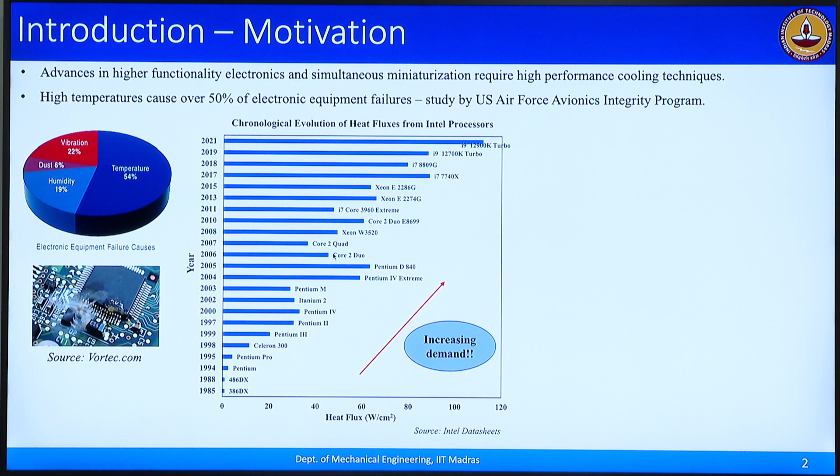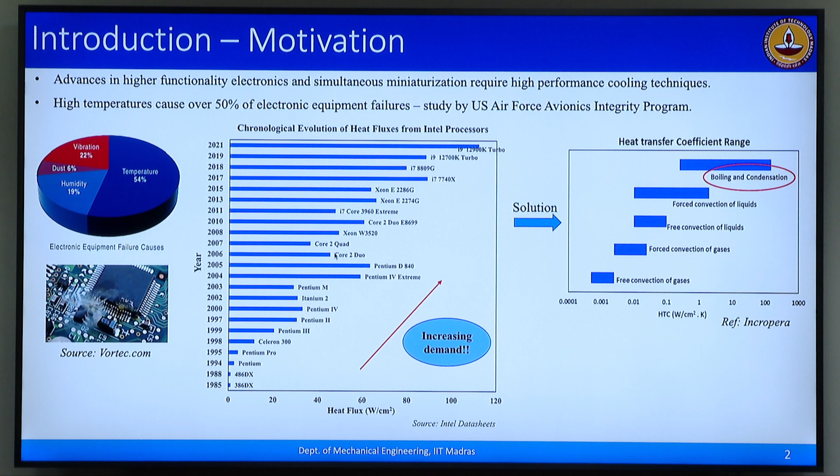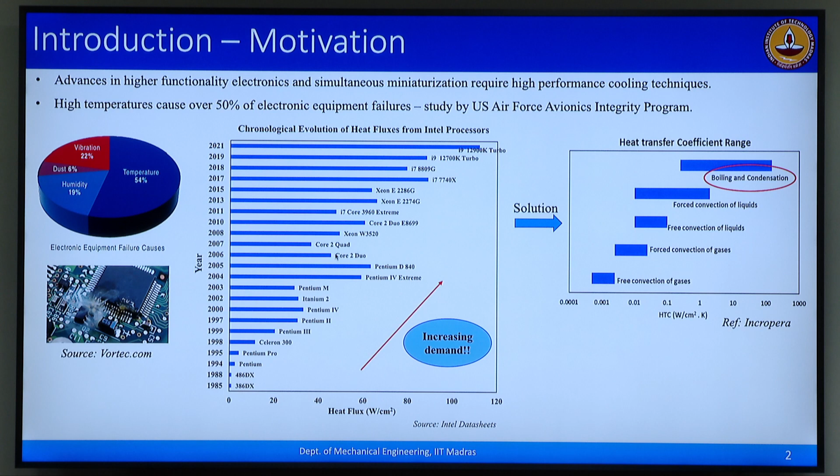If we look at the failures, more than 50% of electronic chip failures are due to temperature, or high temperatures. And if we look at the solutions for removing this heat, we can start with natural convection, and finally the highest heat transfer coefficients we can get are from boiling and condensation. So we can use a device which combines boiling and condensation phenomena together, and the possible solutions for that are heat pipes or thermosiphons.

These heat pipes and thermosiphons use boiling and condensation, as you have already seen before. We will talk about modifications of that—like if we change the wetting conditions of these heat pipes or thermosiphons, how we can further improve the performance.

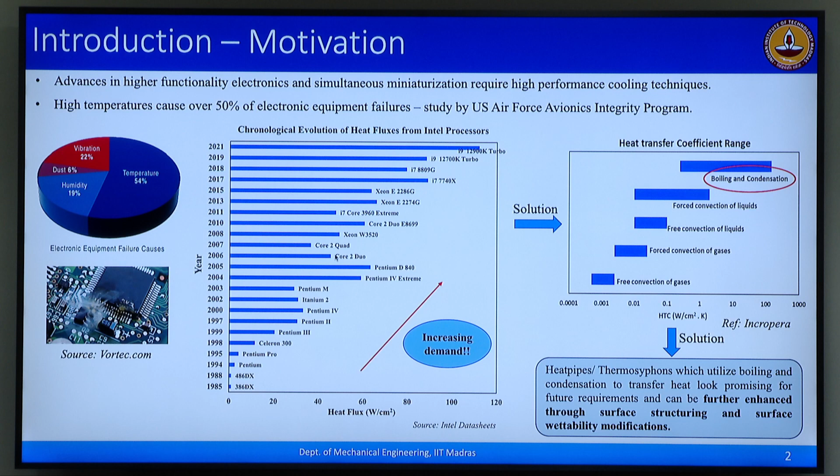Before going into wettability or surface modifications, since there are many students here, I will first define what wettability is. When we talk about wettability, we are talking about liquid spreading on a surface, and we define a contact angle. This contact angle is: when you put a droplet on a surface, the angle it creates at the three-phase contact line is the contact angle, which we show as theta.

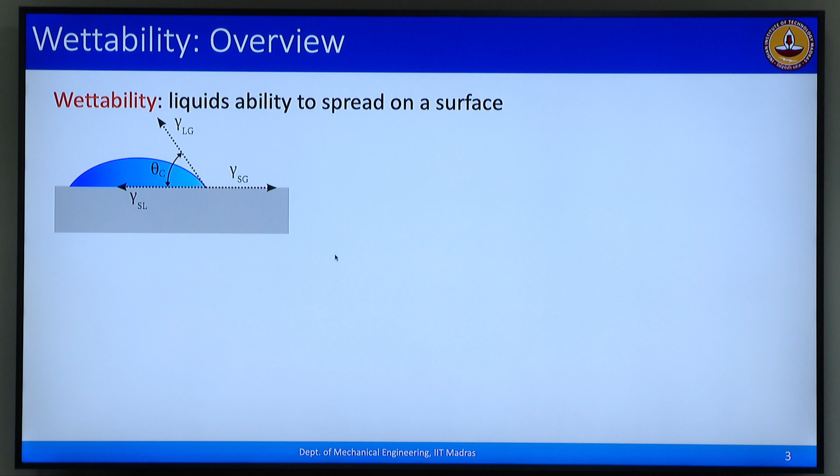So theta is the contact angle, and as I said, we define the contact angle like this. This is the classical Young's equation where the surface energies are related to the contact angle.

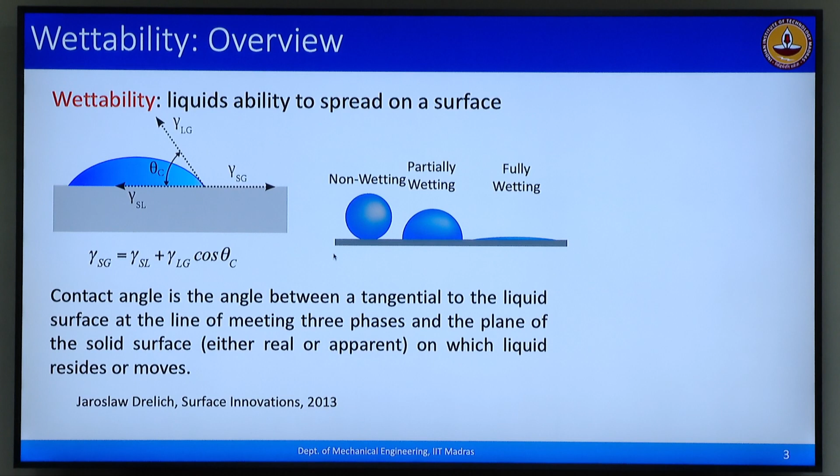Depending on the surface, a liquid can form different types of configurations. If a surface is hydrophilic—the last configuration here—the liquid will spread on the surface, and we call it fully wetting. If the liquid completely spreads on the surface, or the contact angle is close to 0, we call this surface superhydrophilic. If the liquid makes an angle less than 90 degrees but more than 10-15 degrees, we call it a hydrophilic surface. If it is more than 150 degrees, we call it superhydrophobic, and more than 90 degrees is hydrophobic.

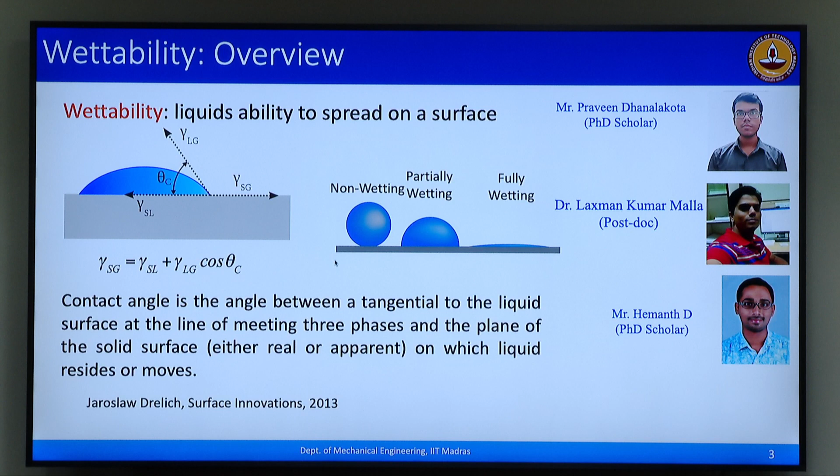Today I will talk about work mainly done by our students—mainly Praveen, Laxman, who was a postdoc, and Hemanth. We will talk about their work mainly. There are two more definitions required: one is advancing contact angle, the other is receding contact angle.

When you put a liquid on a surface, this is a way to measure the advancing contact angle. Now if you tilt the surface, it will create two different angles—one in the front, one in the back. We call the front angle the advancing contact angle, and the back one the receding contact angle.

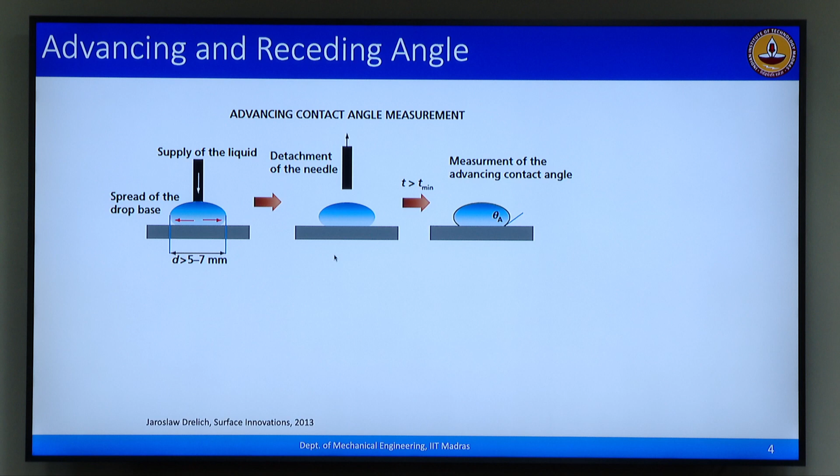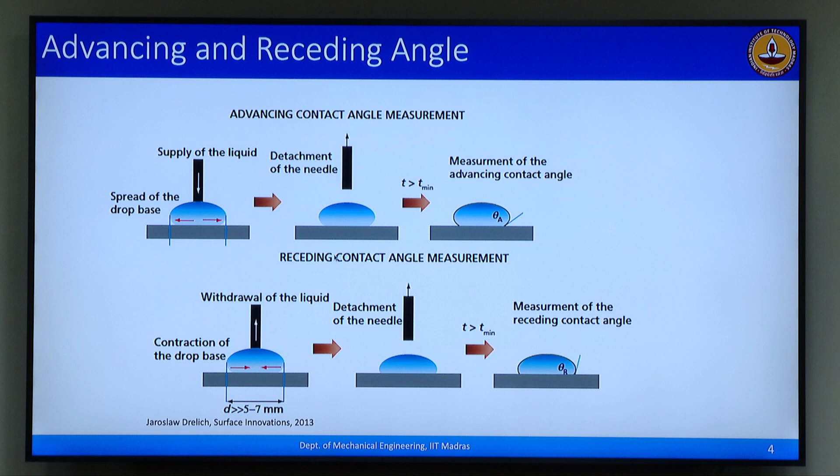To measure that, generally we put liquid on a surface and then pump it, measuring the angle as it advances. Similarly, if we try to recede or withdraw liquid from the droplet, the diameter changes, and we call that the receding contact angle. The difference between the advancing and receding contact angle is called the hysteresis of the surface.

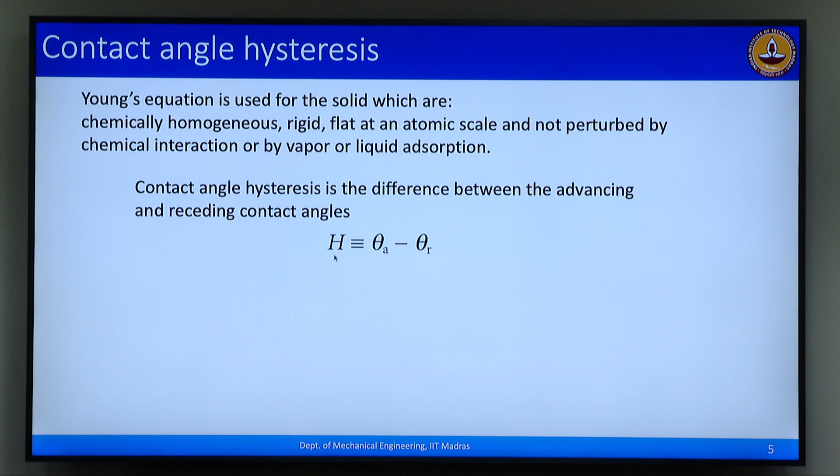With this background, I will start the discussion on wettability modifications on the devices. This contact angle hysteresis, depending on how we create the surfaces, can be very high—like 10 to 50 degrees—or if we make a superhydrophobic surface with very low contact angle hysteresis, it can be below 5 degrees.

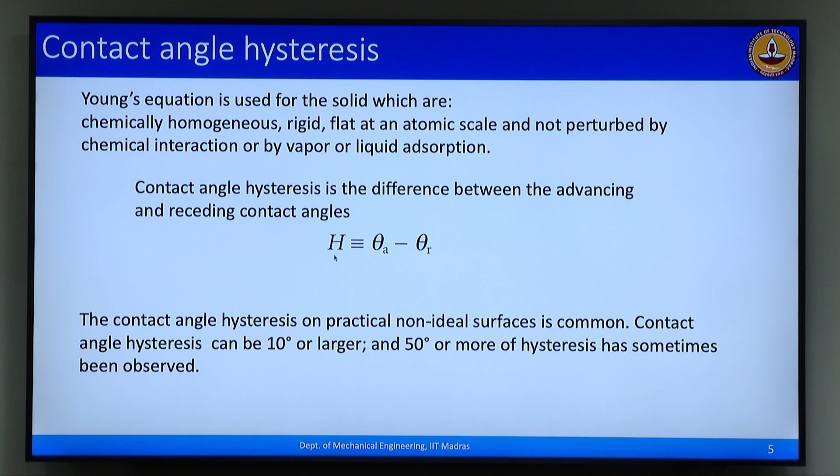So, first I will start with a pulsating heat pipe, what we have seen in the morning today. This is the working principle of a wick based heat pipe, where you have a wick and the liquid will evaporate, go towards the condenser, and come back through the wicking.

A pulsating heat pipe can also be of two types. One is a capillary tube pulsating heat pipe, where you have capillary tubes, and vapor plugs and liquid slugs will move, or it can be a flat plate pulsating heat pipe, like the one you can see here. It is like a flat plate where microchannels are cut into it, with evaporator sections, condenser sections, and in between adiabatic sections.

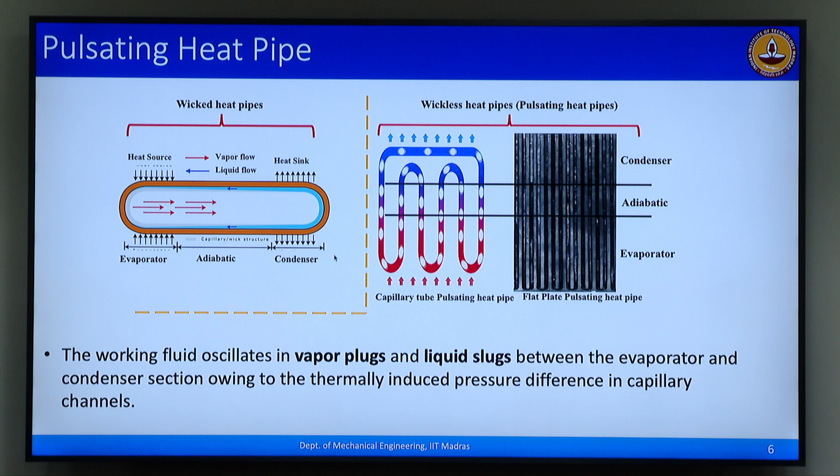This contact angle, or the surface properties, have different roles, particularly in boiling and condensation. This video should play. Okay, so it is playing. If you have a very low contact angle on a surface, your bubble dynamics will be different in boiling conditions as well as in a condensation scenario.

In this condensation scenario, the first figure is a film-wise condensation. If your surface is hydrophilic or superhydrophilic, you will see film-wise condensation. If your surface is hydrophobic or superhydrophobic, you will see drop-wise condensation.

And in the flat plate pulsating heat pipes, we can modify either the evaporator or the condenser, or generally you can modify the whole heat pipe itself.

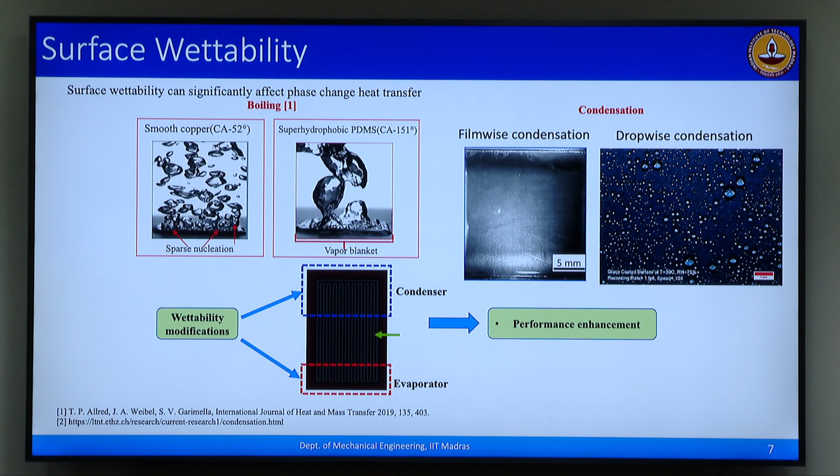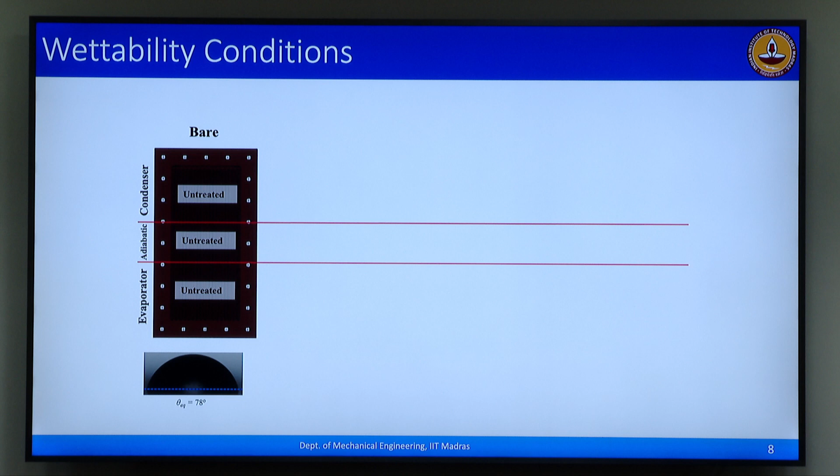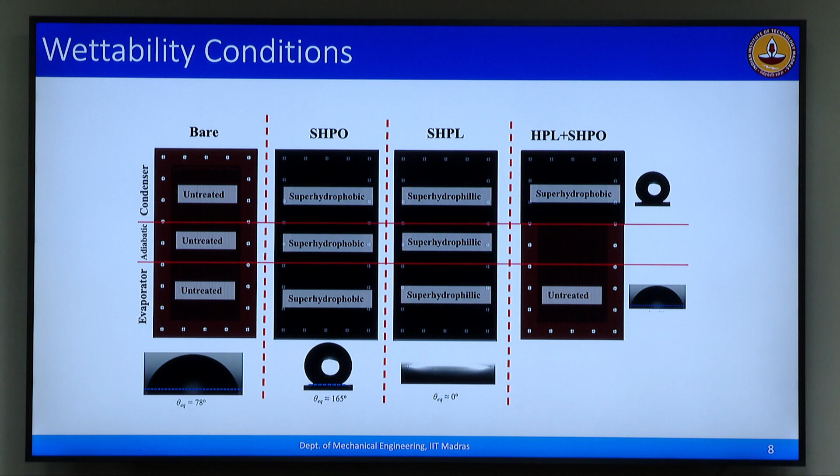What we did: we took a bare surface which has a contact angle around 78 degrees. We modified it to be superhydrophobic, with all parts completely superhydrophobic. We also made all parts superhydrophilic, and then we did a partial version with a superhydrophobic condenser and a hydrophilic evaporator and adiabatic sections. We observed the performance and how it changed.

I will not go into very much detail about it because Marco has already discussed the heat pipes. I will just talk about how we can modify surfaces a little bit, so if there are students who want to use these modification techniques, you can. These are not very difficult to do; they are mainly chemical based techniques.

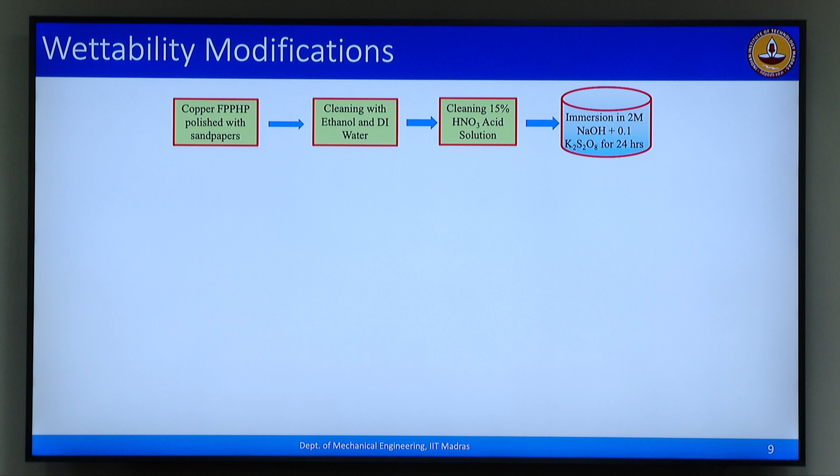So these are all copper based heat pipes, flat plate pulsating heat pipes. We took this copper flat plate pulsating heat pipe, polished it with sandpaper, then cleaned it with ethanol and DI water, then cleaned with nitric acid, then immersed it in sodium hydroxide and potassium persulfate for a certain time, dried it in a hot oven, and got a superhydrophilic surface.

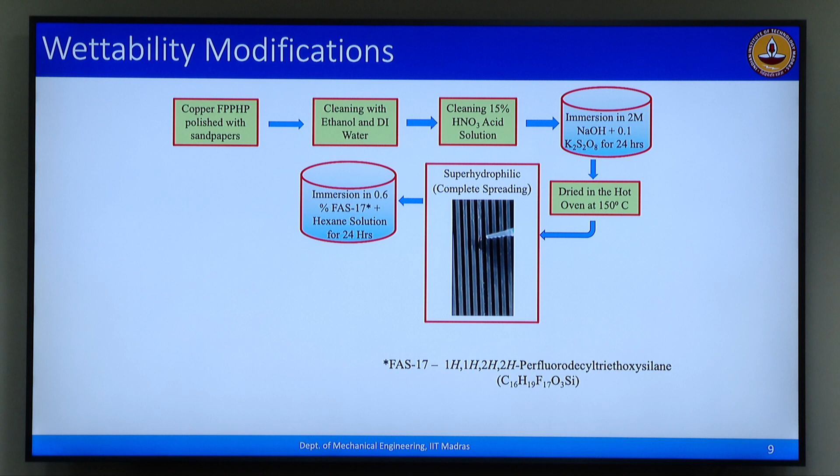Now, if you use a FAS — we talked about PFAS yesterday, that it may be banned at some point, but we are currently using it. We have also used some other techniques where you don't need any agents to create superhydrophobicity, but we have not applied anything like that here yet. If you are interested, we can talk about other methods of creating superhydrophobicity on surfaces and so on.

Then if we dry it, we get a superhydrophobic surface, with a contact angle around 160 degrees, and our hysteresis is also very low, less than 5 degrees. So this is one way of creating this.

After doing this, we observed the behavior corresponding to 60 watts, and we saw the best thermal performance when we had the superhydrophilic configuration — they call it superhydrophilic — and we got better performance and so on.

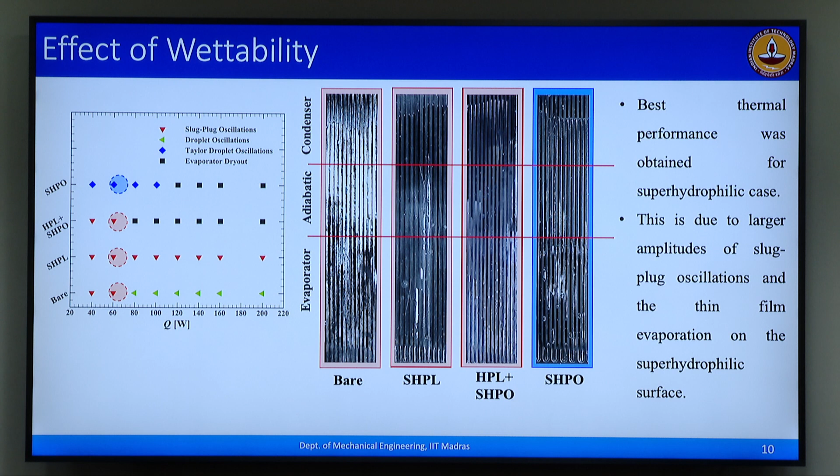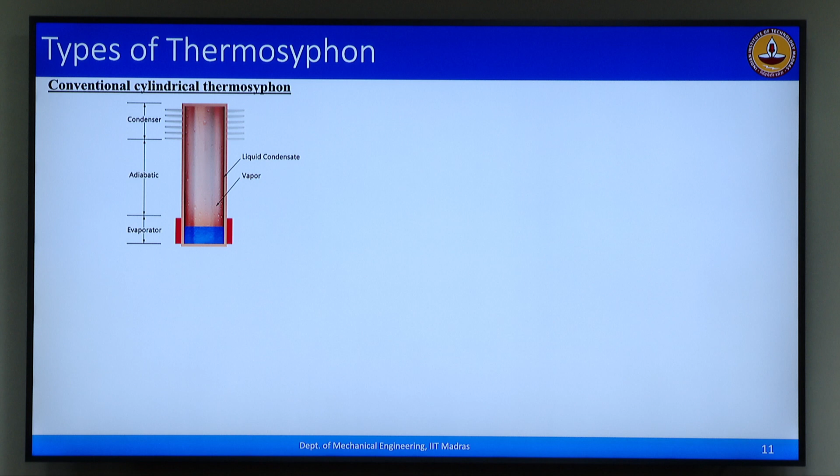With this, I will move to thermosiphons, where I want to discuss more rather than the heat pipes. We have worked on thermosiphons, and there are basically different types of thermosiphons.

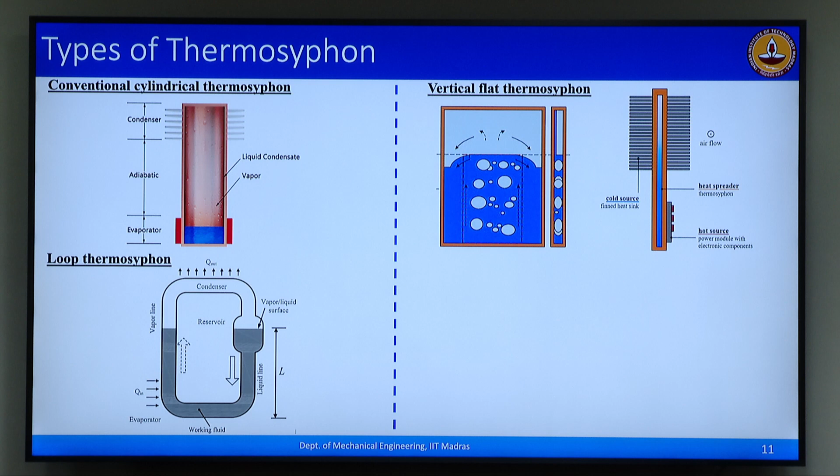Thermosiphons, as Marco also mentioned, are similar to heat pipes, particularly cylindrical thermosiphons. But there are other types, such as loop thermosiphons or vertical flat thermosiphons. We also have horizontal flat thermosiphons, which are compact and more suitable for cooling electronic devices.

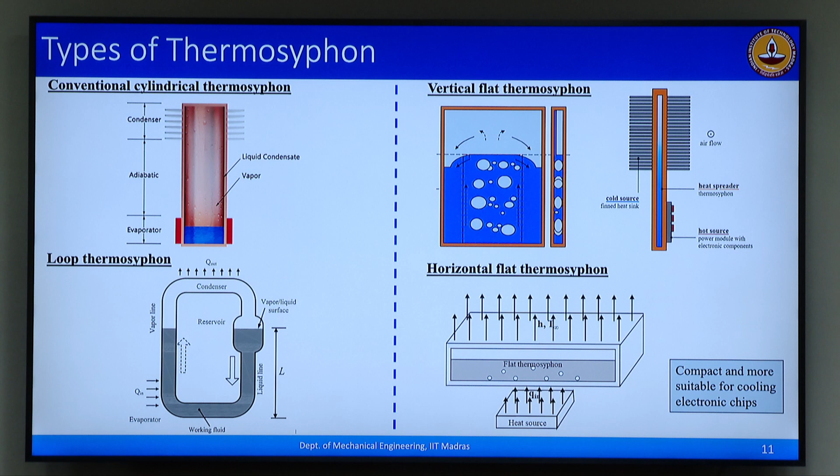Even if you have multiple heat sources, you can use this type of compact flat thermosiphon to cool it down. What we used is a thermosiphon with a heat source.

This is our initial work, using a compact flat thermosiphon which we call CFT, and we changed the surface conditions. We used a hydrophilic evaporator, a superhydrophobic condenser, and different combinations, to see how the performance changes with these modifications.

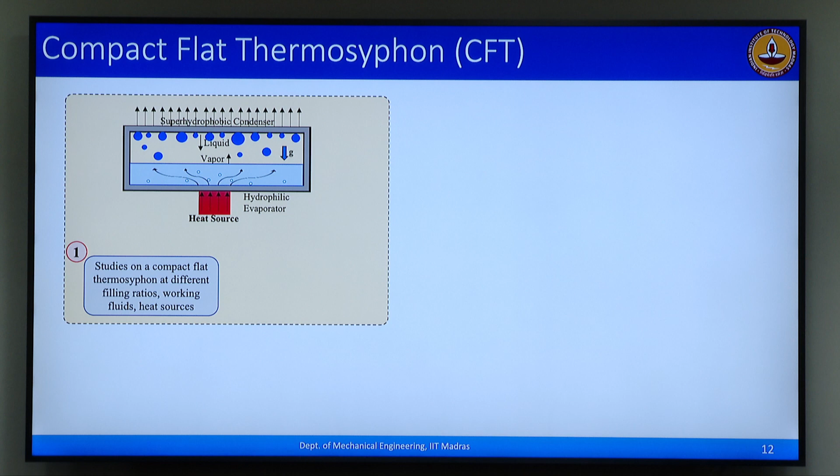Our objective is to study these compact flat thermosyphons at different filling ratios, working fluids, and heat sources. We also used wettability modifications on the evaporator and condenser to see how the behavior changes.

We have also modified the condenser to have hollow fins. So instead of a flat condenser, we looked at how the behavior changes when there are hollow fins at the top.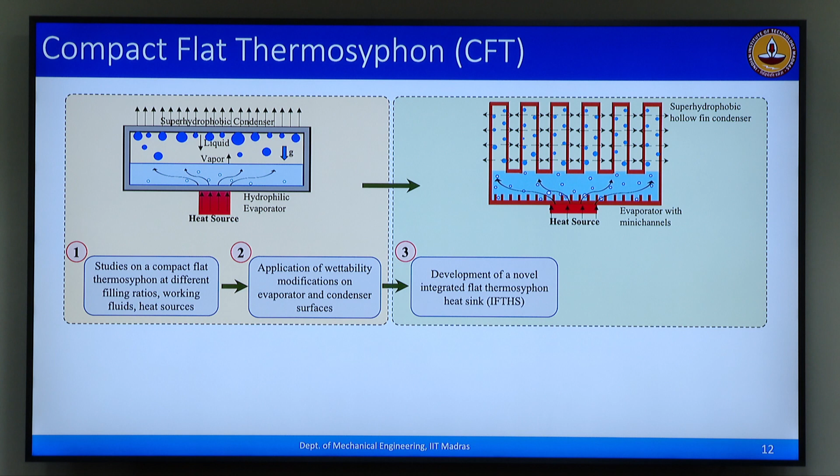We created an integrated flat thermosiphon heatsink with hollow fins, to see how that behavior changes. We also added minichannels in the evaporator section to get the benefit of both sides, the evaporation and the condensation.

So the objective is to study the thermal performance of compact flat thermosiphons for different filling ratios and working fluids, look at the wetting characteristics, and then for enhanced performance, see how we can use hollow fin type structures.

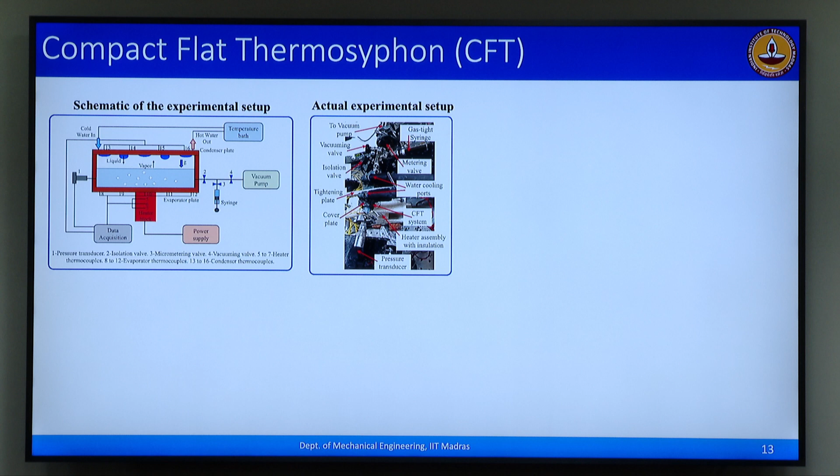To start with these compact flat thermosiphons, this is our schematic, and this is the actual setup. I will just skip this and start with the experimental process.

To understand the heat flux, the main problem with these closed devices is that you cannot see what is happening inside. We can only understand the outside, mainly the temperature data. We don't know exactly what the heat flux distribution inside is, or how the bubbles are departing from the evaporator section and how it is condensing. So we did separate experiments to understand the fundamentals of it.

There are other techniques to predict the heat flux on the inside surface, but what we did here, since we have multiple thermocouples inside the heated block, was use 1D Fourier's law to predict the heat flux given at the evaporator surface.

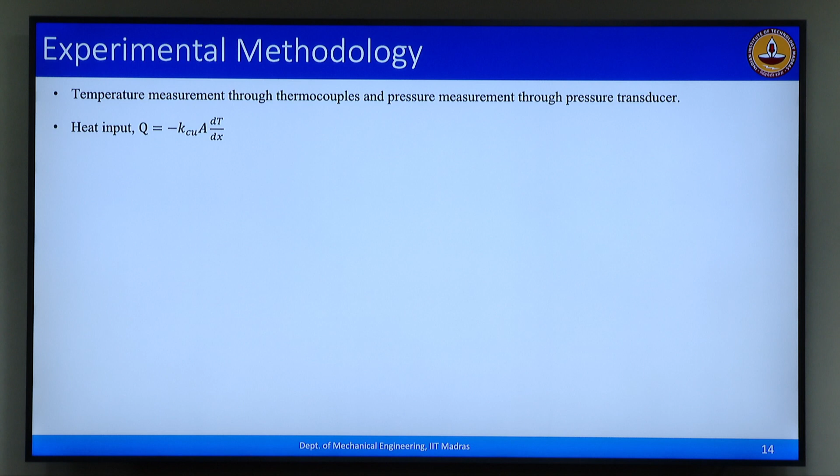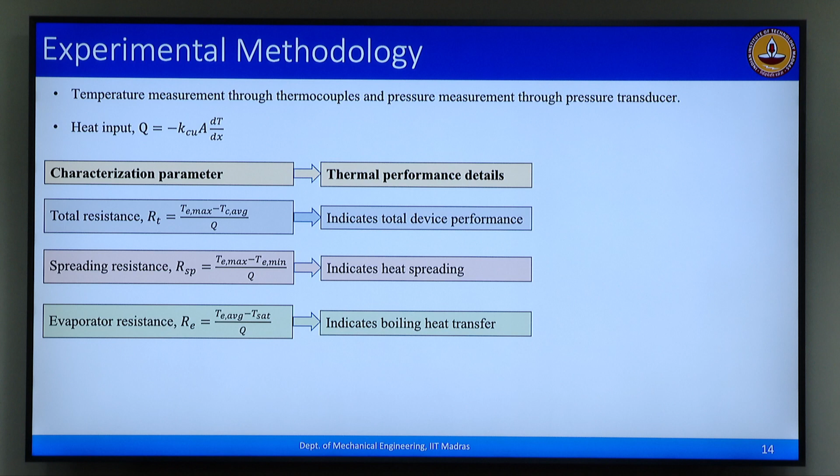Then we can characterize the total resistance, which indicates the device performance. We can calculate the spreading resistance, which indicates heat spreading. Then we can calculate the evaporator resistance, which indicates the boiling heat transfer, and finally the condenser resistance, which gives the condensation heat transfer. These are some indicators of our device.

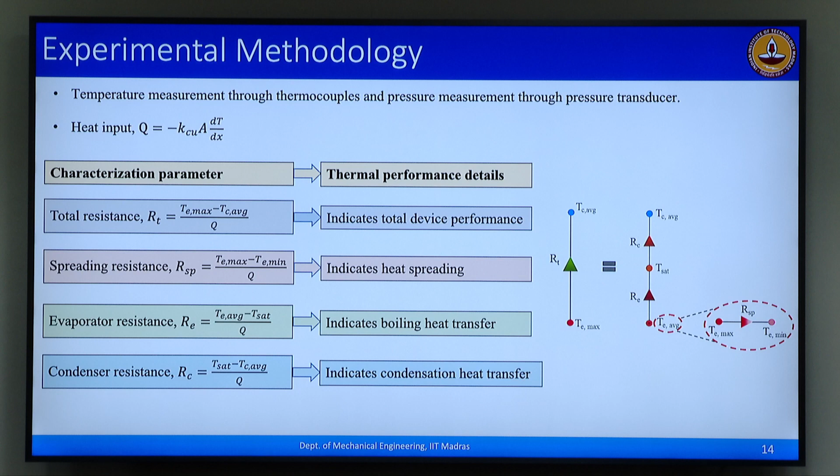We can also have the resistance map and so on. To see the effect of the working fluid, we did experiments with acetone, water, and ethanol, and observed how these behaviors change.

We found that at the evaporator, at around 40 watts per centimeter squared, the maximum temperature is for ethanol and the lowest temperature is for water.

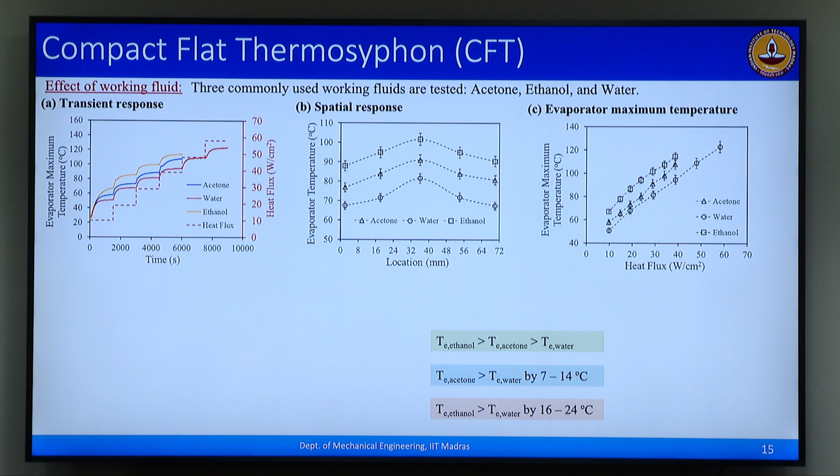Looking at performance in terms of total resistance, water has the lowest resistance. However, there is no significant difference in spreading resistance. For evaporator resistance, water is again the lowest, while ethanol has a higher evaporator resistance. The condenser resistance is also lowest for water.

With all this, we identified that water is the best working fluid due to its low vapor pressure and high latent and specific heat. So for these particular conditions, without any modifications, water performs better than ethanol and acetone.

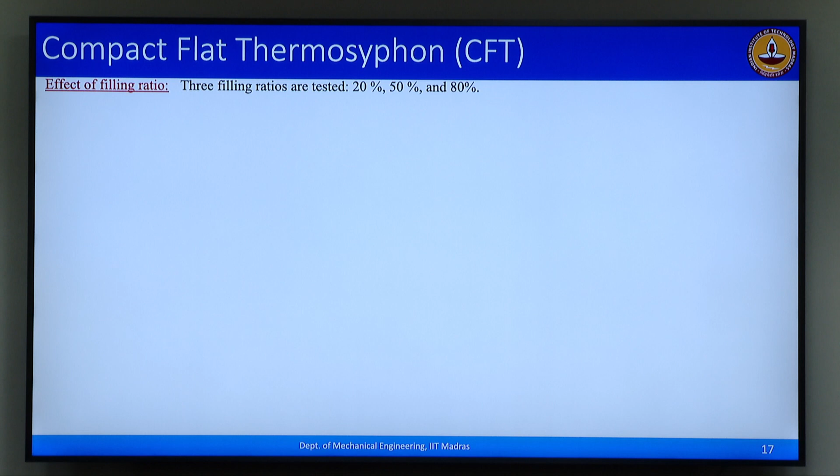We then also studied the effect of filling ratios.

So what we have observed is at 20% filling ratio, it is more than the 80% and the 50%. I will come to that reason here.

So when we have a 20% filling ratio, then we have less working fluid, and that deteriorates the performance. Whereas when the filling ratio is very high, like 80%, then it is giving a flooding type of situation, and that deteriorates the thermal performance. Whereas 50% gives the best performance, but we are not saying that 50% exactly is the optimum, just that it is better than these three conditions.

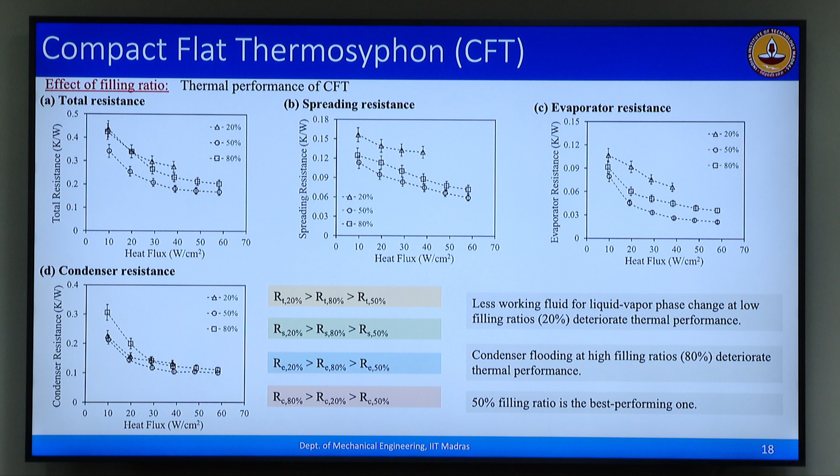So to understand the physics of how it is happening, as I said earlier, we have to do some kind of numerical modeling to understand how the droplet is departing and how it will come back and so on. So we have started this numerical modeling of the whole system.

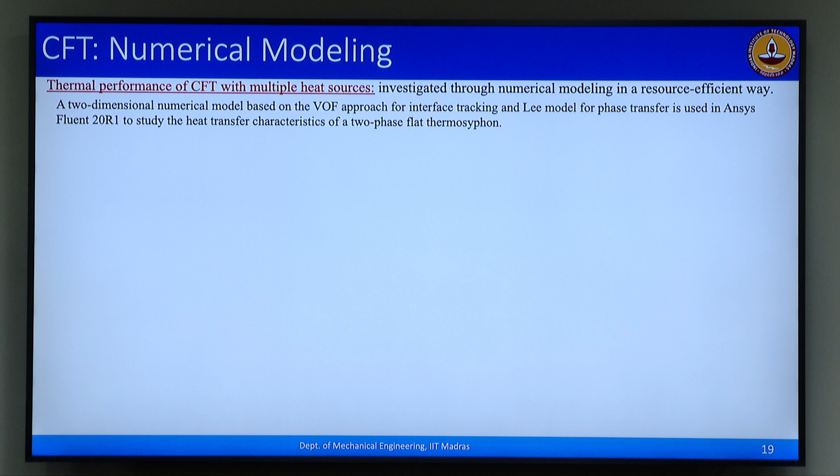So particularly if you have multiple heat sources, instead of creating another device to test it, we have done numerical simulations, but these numerical simulations are also at a very early stage. We did only 2D numerical simulations. We have not taken care of the effect of roughness or the surface wetting conditions.

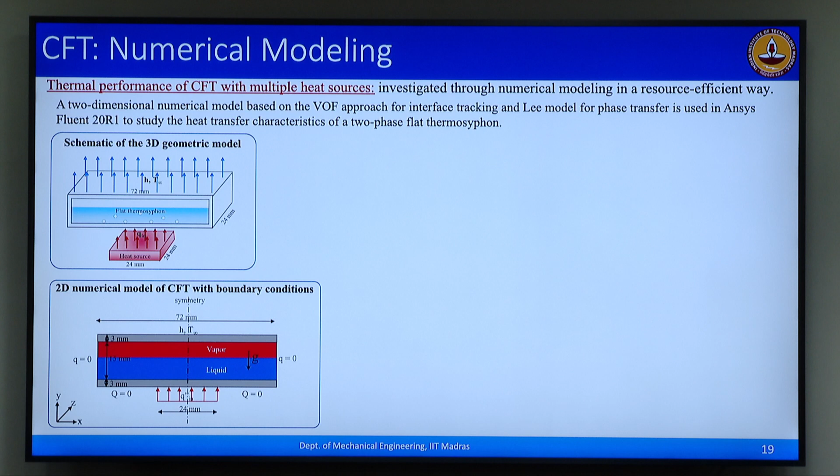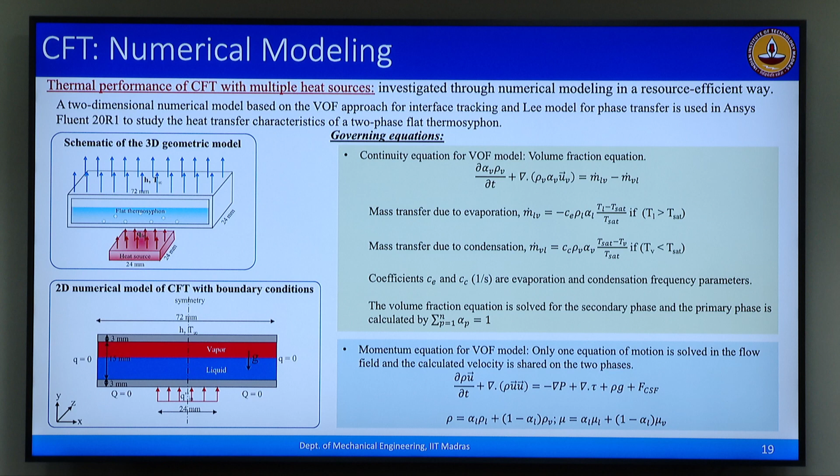What we have used is a VOF model in ANSYS, and we have used a Lee model to model these evaporations and condensations on the surface. As this is a multi-phase modeling, we have only solved the secondary phase, and the primary phase we have subtracted from 1 and got that.

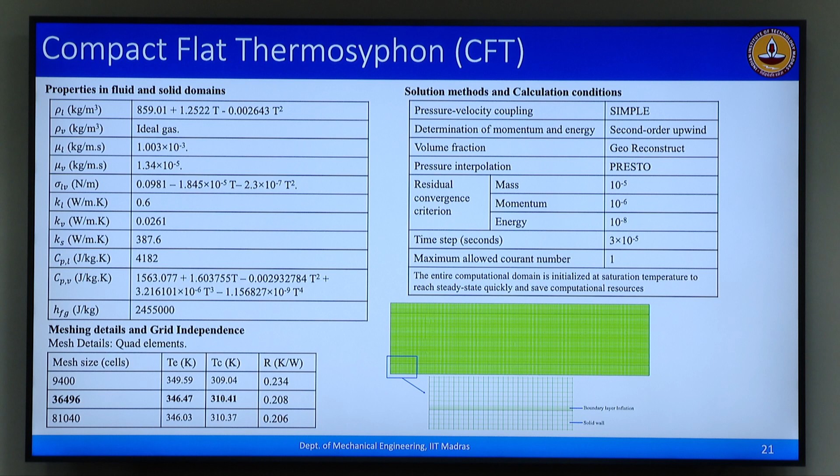So then this is the surface reconstruction. I will not go into detail of it, maybe we can discuss it separately. So these are the conditions, and we have done only 2D simulations. We did a grid independence study, and I will show you.

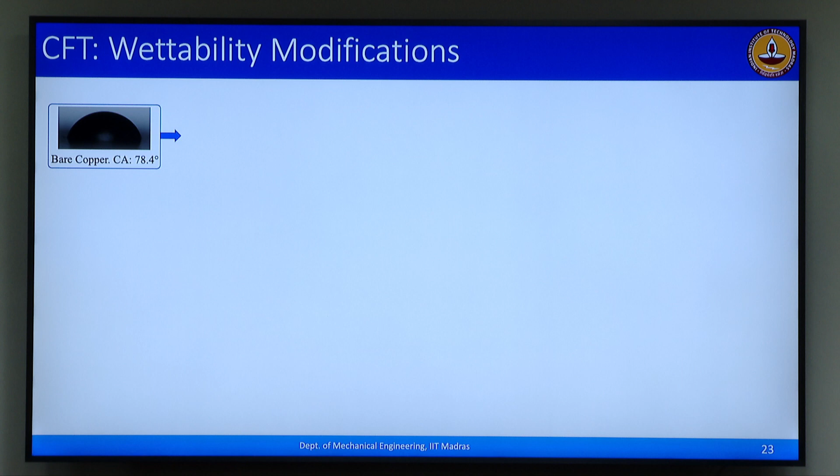So now if we do the wetting modifications - so far we are talking about without modifying the surfaces - this method is also similar because we are using copper again. So I will just skip through it.

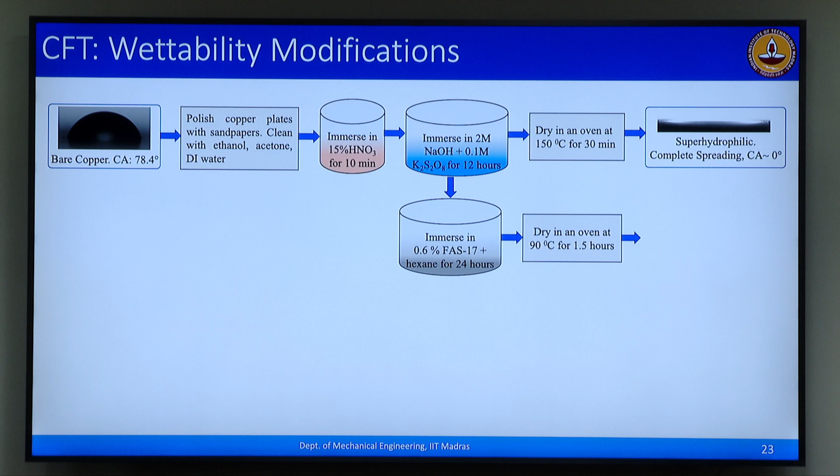So we have the similar method, but with this we have created different types of flat plate, this CFT, flat thermosiphon. We created actually 5 CFTs. In one case CFT1 has both bare copper, both hydrophilic. CFT2 is evaporator hydrophilic and condenser superhydrophobic, CFT3 is superhydrophilic and superhydrophobic, CFT4 is superhydrophilic and hydrophilic, and CFT5 is both superhydrophobic.

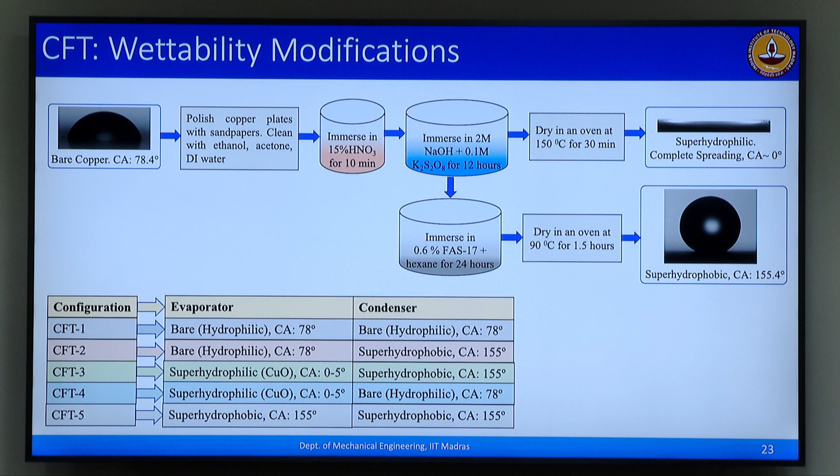Then we compared the performance of it, and what we observed is, if you see CFT5, when both are superhydrophobic, the evaporator temperature is very high. And if we have CFT2, where the evaporator is hydrophilic and condenser is superhydrophobic, our performance is better, and the temperature is much lower - it is around 60 degrees compared to 120 degrees.

This is happening because we have a superhydrophobic condenser where we have drop-wise condensation, and that improves the performance of the overall system. So then we measured for different heat fluxes and so on, and this is the same thing we are seeing in the graphs.

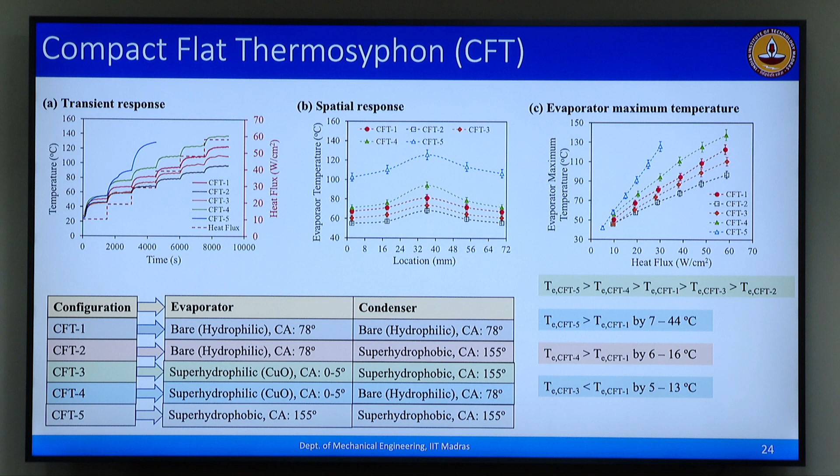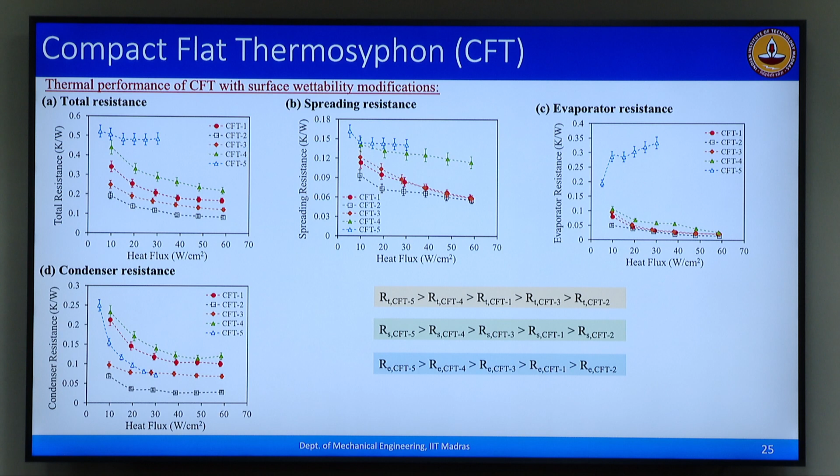CFT5 has a superhydrophobic condenser, so it is in between for the condenser resistance, but the overall resistance is much lower for CFT2.

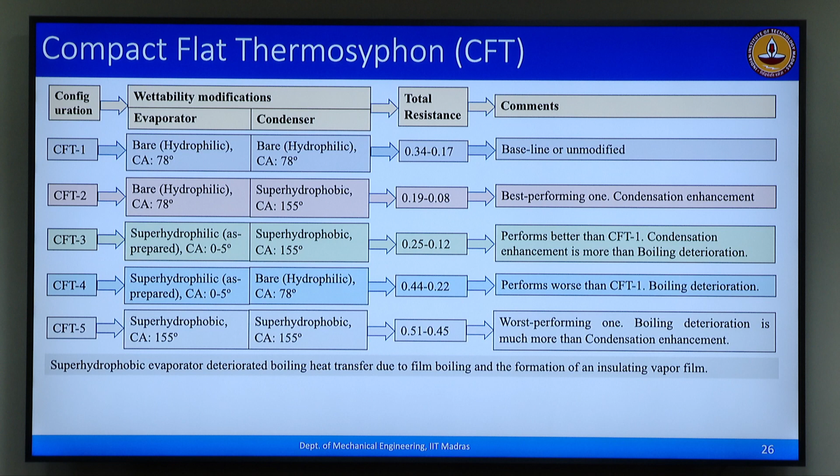Let's review our understanding from before. We have CFT1 where the baseline is unmodified, and CFT2 where we have hydrophilic and hydrophobic surfaces. We have the best performance because condensation is enhanced by the superhydrophobic condenser. CFT3 has a superhydrophilic evaporator and superhydrophobic condenser, so performance is better than CFT1 because condensation is enhanced more than boiling deteriorates. Performance is worse in CFT4 because boiling deteriorates since we used a superhydrophilic evaporator, so boiling doesn't work properly. In CFT5 performance is worst, as boiling deteriorates much more than condensation is enhanced.

So what we have seen is that a superhydrophobic condenser improves condensation heat transfer through dropwise condensation, and quickly returns the liquid to the surface or the evaporator, which improves overall performance.

So then we started looking at whether we could improve the condenser surface with a fin. We did three types of experiments: compact flat thermosiphons as shown earlier, a solid fin, and a hollow fin.

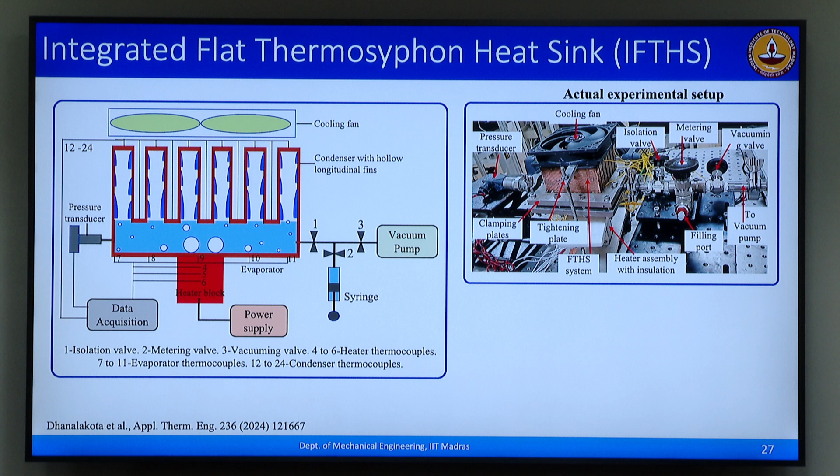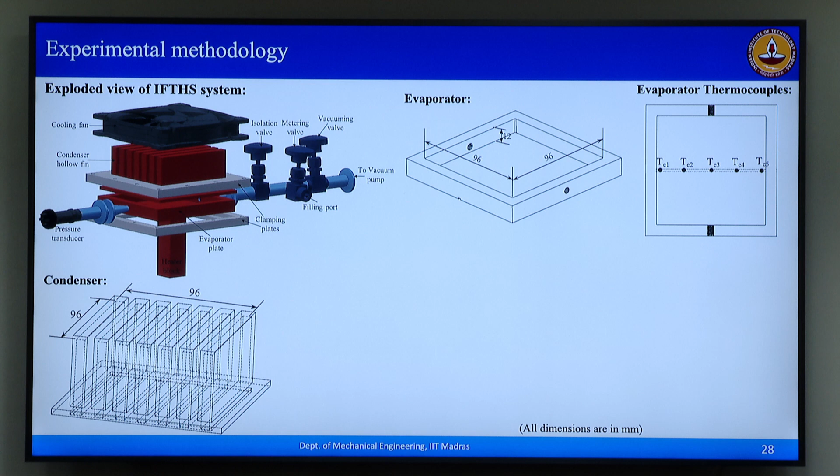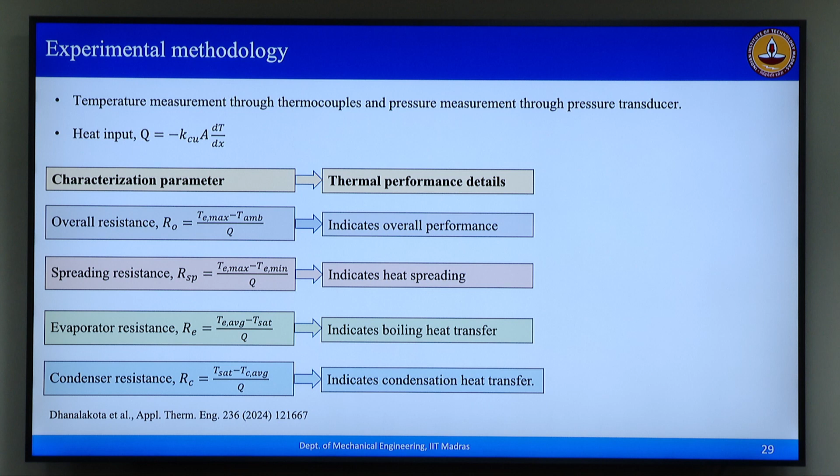This is the schematic of the experimental setup. We used similar overall resistance, spreading resistance, evaporator resistance, and condenser resistance to understand it. We compared configurations: condenser without any fin, condenser with a solid fin, and condenser with a hollow fin, to see how performance changes.

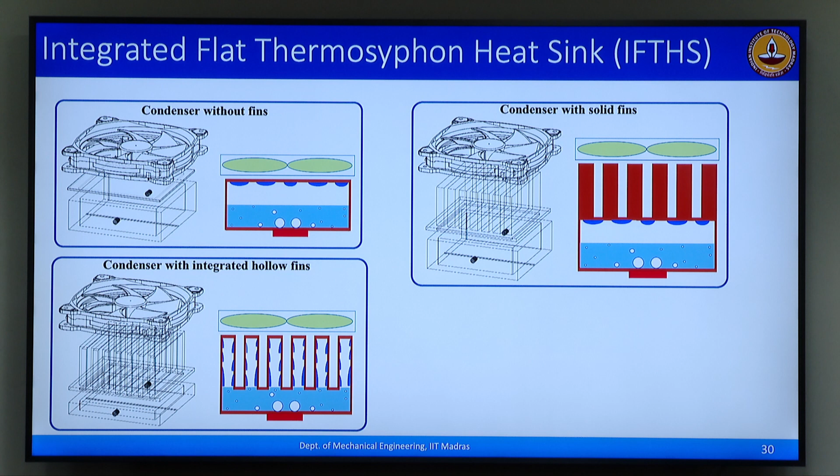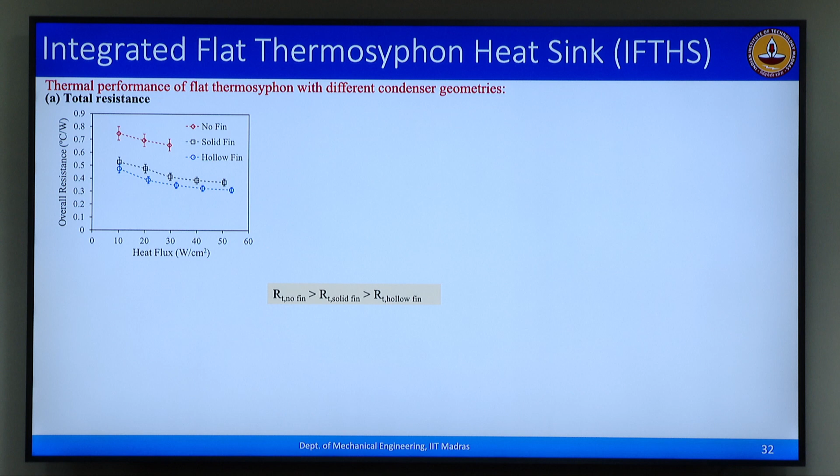So afterward we looked at the overall resistance, which shows similar behavior, telling us the hollow fin performs better than the no-fin condition. However, there is no significant difference in the spreading and evaporator resistance; the condenser resistance for no fin and solid fin is almost similar, compared to the hollow fin. So condenser with integrated hollow fins performs better due to better vapor distribution, since we have higher surface area and better drainage from top to bottom.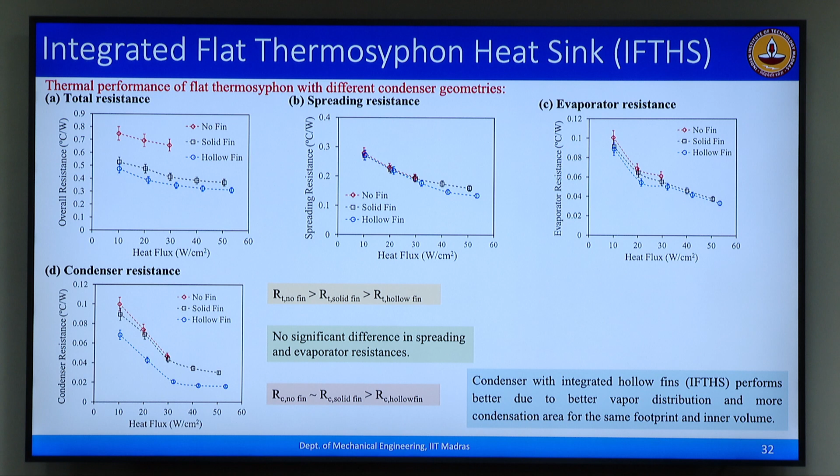We also studied filling ratios, looking at the effect of 80%, 20%, 60%, and 40% filling ratios. I'll show what we observed through the resistance data here.

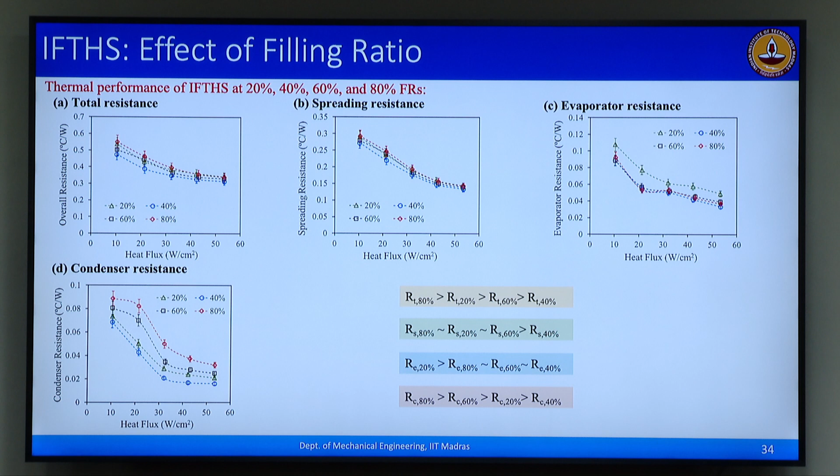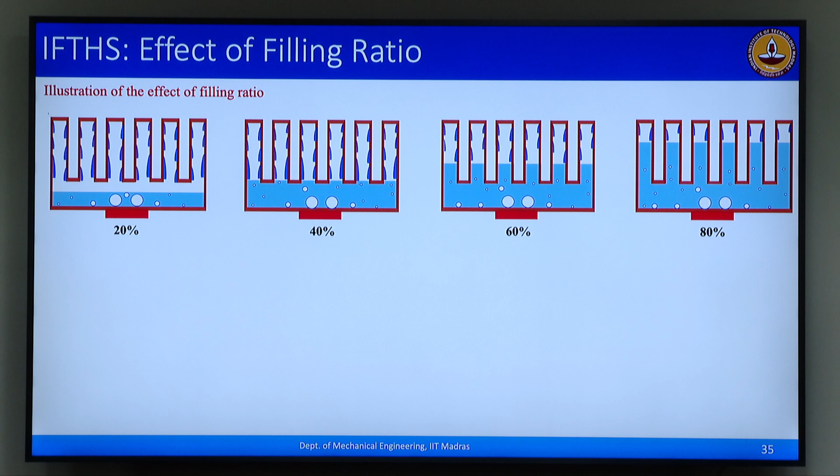We found the 40% filling ratio performs better, because 20% filling ratio is too low, whereas 60% and 80% are too high and cause flooding. Basically, an 80% filling ratio actually decreases the overall condensation area. Schematically, 20% filling ratio is too low, while 60% and 80% actually flood the condenser area. So we need an optimum filling ratio, and we found 40% is the best performing filling ratio for our conditions.

That said, we have only studied a particular type of geometry; there's a lot of room for improvement here, with optimizations required for spacing, size, and so on. We have shown that it's possible to improve performance using hollow structures, which essentially give you more condenser area.

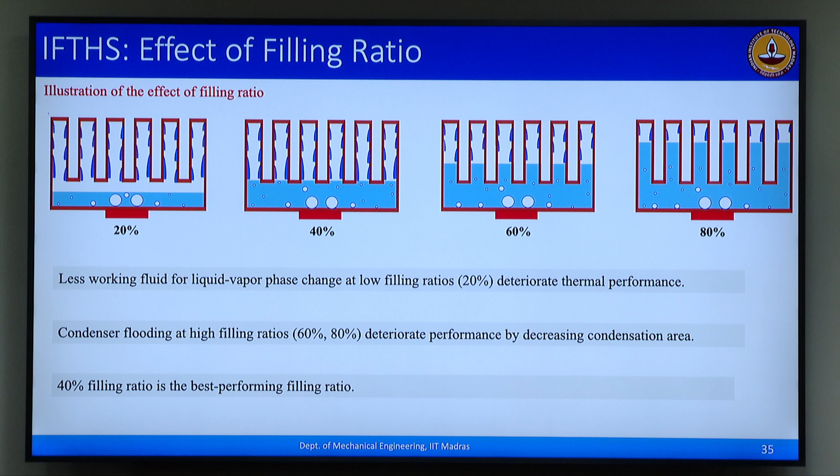So then we considered improving through surface modifications. We used a design with a bare evaporator and bare condenser without any modifications, then a bare evaporator with a superhydrophobic condenser, then a mini-channel evaporator with a bare condenser, as well as a mini-channel evaporator with a superhydrophobic condenser.

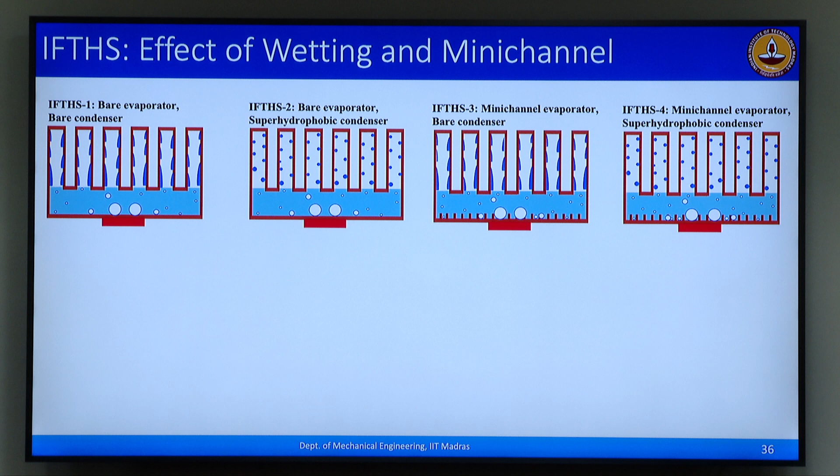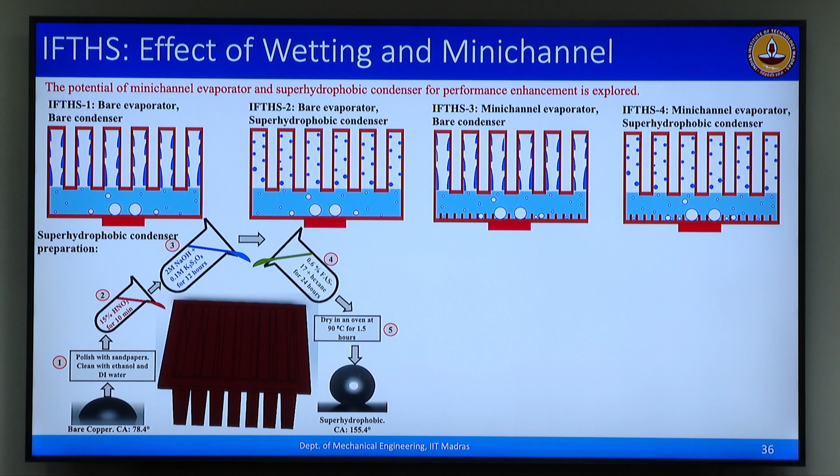So we did all these combinations and tried to see how we can improve the performance. Superhydrophobic surface creations are similar to what I was talking about. Bare copper is around 78 degrees and superhydrophobic surface is close to 160 degrees, and we have a mini channel evaporator, I will not go into that.

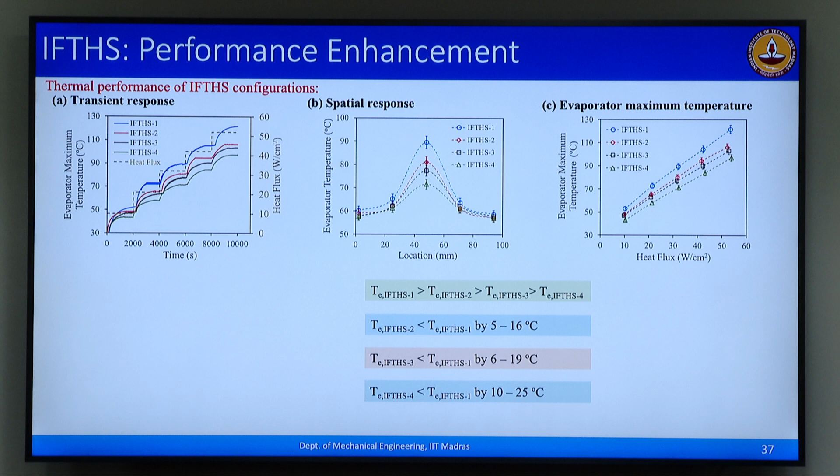So overall what we have seen, when we take advantage of the mini channel evaporator and superhydrophobic condenser, it performs better than the bare evaporator and condenser, which is expected. We got that, and this has also been identified through the resistance map.

What we have seen is that the superhydrophobic condenser improved the performance by 16% due to quicker condensate return from drop-wise condensation, and the mini channel evaporator improves almost 19%. If we take both advantages, it is almost 36% improvement. It is not additive, but it is close to 36% if we do that.

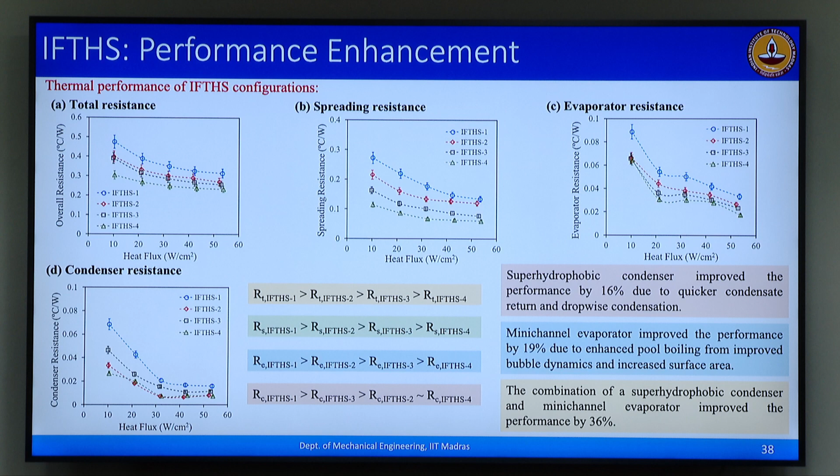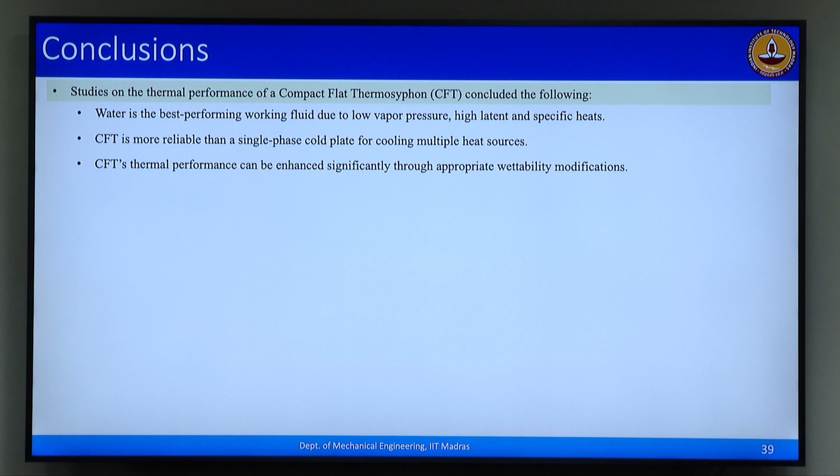In conclusion, what we have identified is the best performing working fluid in our system, due to low vapor pressure, high latent and specific heats, and safety, is more reliable than single phase cold plate cooling, particularly for multiple heat sources. This CFT performance can be improved through wetting modifications, although there will be questions of durability and other things, but these are possibilities to improve performance.

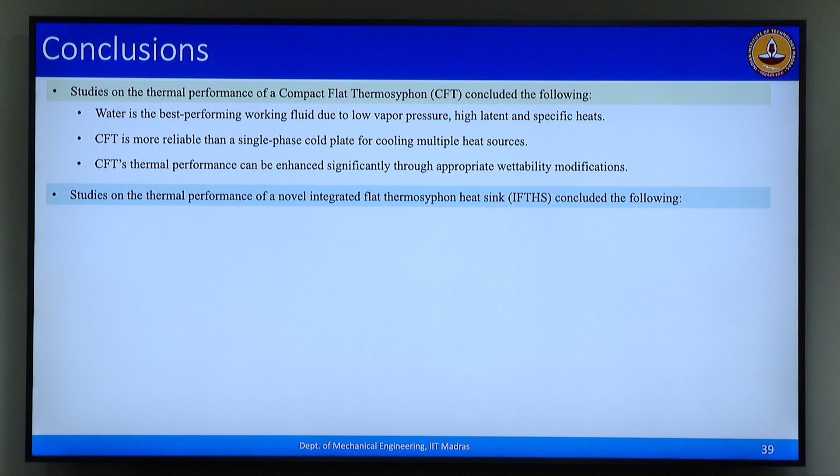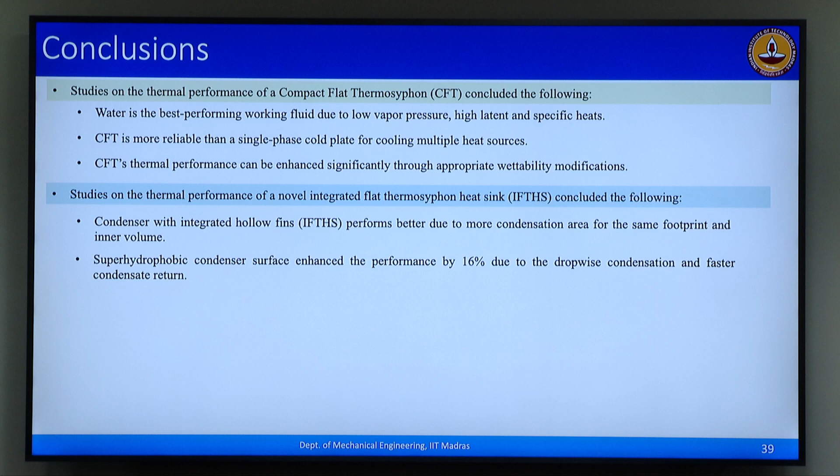Particularly with this integrated flat thermosiphon heat sink, what we observed is that it performs better due to more condensation area with the same footprint and inner volume. However, the superhydrophobic condenser surface enhances performance due to drop-wise condensation. So combinations of the mini channel evaporator and superhydrophobic condenser give the best performing device for us.

So with that I want to conclude, but the final note is: these are all thermosiphons, and this will not work, as Marco was also mentioning, because it is not gravity independent. So if we want to use it in outer space, we have to use vapor chambers or some other techniques that Rishi was mentioning. And for a very small space, we have to use micro mini vapor chambers. There are already some vapor chamber work being done with micro vapor chambers and so on.

Currently we have used only homogeneous wetting modifications. We have not tried biphilic surfaces or patterned wettable surfaces. When we talk about a patterned wettable surface, it means we have a juxtaposed surface of different wettability, which enhances droplet transport and movability. So we can try patterned wettable surfaces, particularly on the condenser, that will remove droplets even easier, and then we have to use it for actual cooling applications.

The sizes of these systems definitely matter, and the particular designs, how you can use them for those applications, we have to take care of that. Sometimes, depending on the application, particularly as Marco was also mentioning, there are a few works on battery thermal management where you cannot use only one type of system, maybe vapor chambers and heat pipes can work together. One example is where one group has used vapor chambers and thermosiphon, and vapor chambers and heat pipes together for battery thermal management.

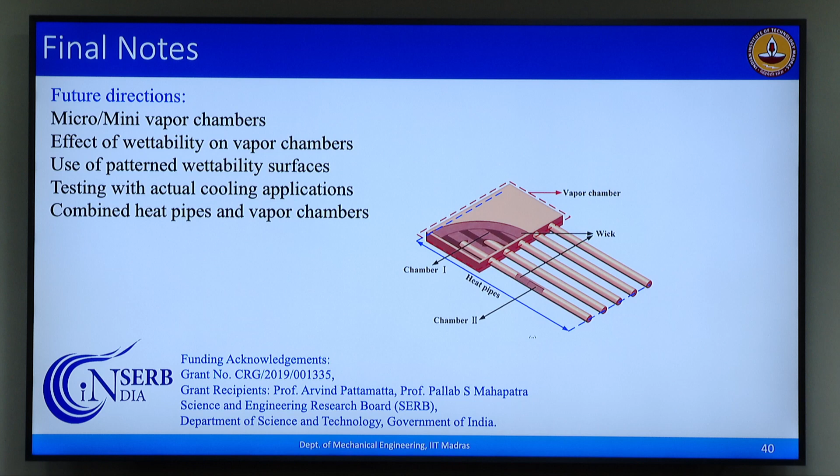So, yeah. Yes. I have. Yeah. Yeah.

Yeah, we can mask and do that. So if you have channels, particularly in a heat pipe case, then it is slightly tricky. You have to probably mask it with the channels. Let's say you do a wax coating or something like that, or some other material that will dissolve with some other liquid or chemical, that will not change the wetting conditions of the other part. That can be done.

If photolithography is so complicated, this is probably something that we can adapt from. Yes, yes, like...